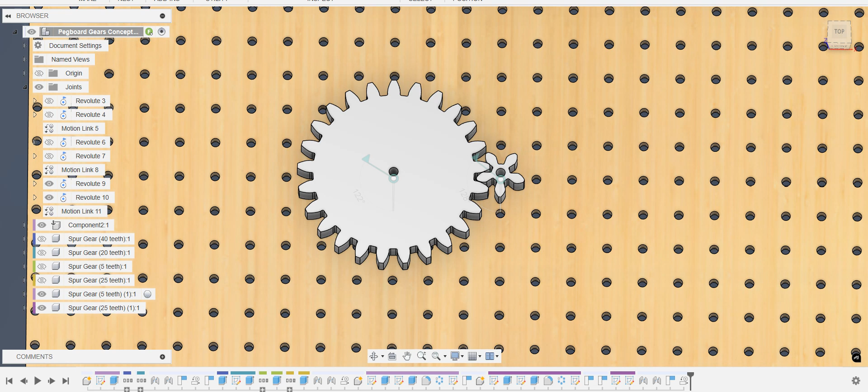So let's head over to utilities, and we're going to go to add-ins, scripts and add-ins. And using the spur gear tool, we're going to make a spur gear, and we're going to add it onto this board. If we check the table that will be acceptable for this 1 inch increment that we've laid out,

the diametral pitch is always going to be 5, and that is to say there's always going to be 5 teeth per inch, okay? Because here it's the number of teeth divided by the pitch diameter there. So 5 teeth divided by the diameter of 1 gets us back to 5. 25 teeth divided by 5 is also 5.

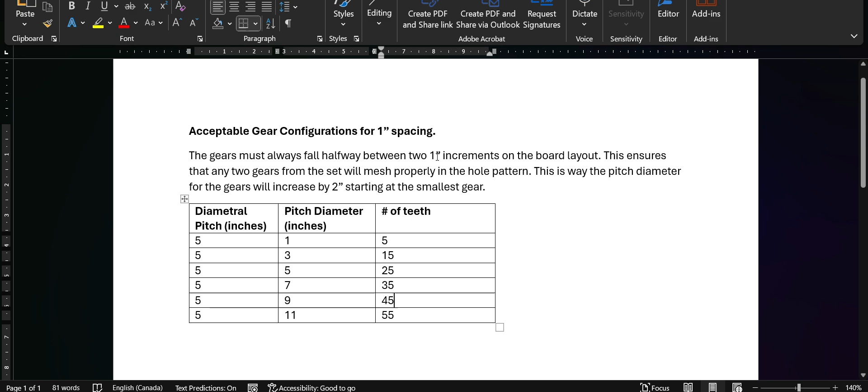So this is a function of the tooth shape, which means that all of the gears need to have this same pitch. So let's make a pitch diameter gear that is going to be 9 inches, and it's going to have 45 teeth. But we know it's going to fit and mesh with the rest of our gears.

So back over to Fusion, we're going to use the English standard, and we're only using that today because the pegboard comes in an English or imperial increment of 1 inch holes. We'll keep the pressure angle at 20 degrees, and the diametral pitch we need to be at 5 teeth per inch. The number of teeth here will be 45, and here we can see the pitch diameter as 9 inches.

Now the backlash, we're going to add a 0.1 millimeter backlash because we're targeting this for 3D printing, and that's going to add 0.1 millimeter of tolerance on either side of the faces of the teeth, just to make them a little bit more amicable to rotation and to take up any sort of extra material space that 3D printing has taken up, or in a real world application, sometimes that's space for lubricant or just play. Okay, so pitch diameter of 9.

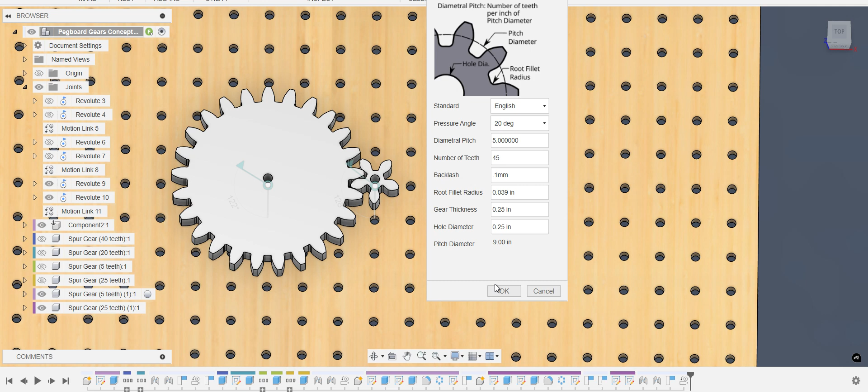And now we're going to attach this to the pegboard here. So I'm going to need to use a joint, but actually based on where it has been created, it makes more sense to move this first as a component. I'm going to move the entire thing. That's important to do it as a component there because we want to move the origin of it as well. And I'm going to select it, and I'm just going to move it so that it's easier to see where it is and work with.

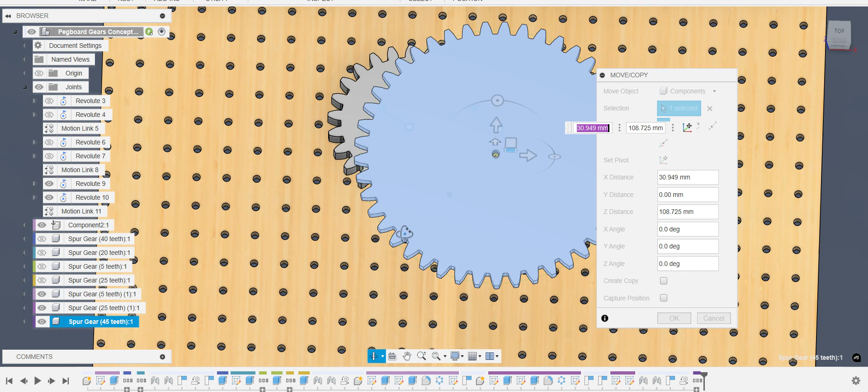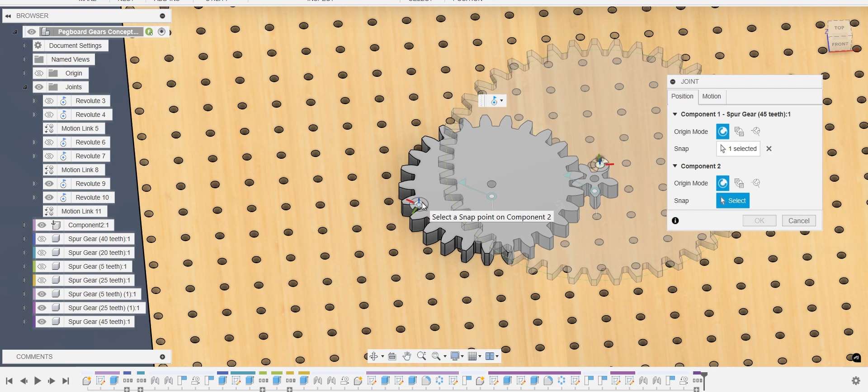Okay, so if I press J for joints, I'm going to select the bottom of the center of the gear. There we go. And now I need to select the correct hole here. So the diameter of our new gear is 9, so half of that is 4.5. And our existing gear diameter was 5, so half of that is 2.5. So that's going to give us 4.5 plus 2.5, that's 7 inches away.

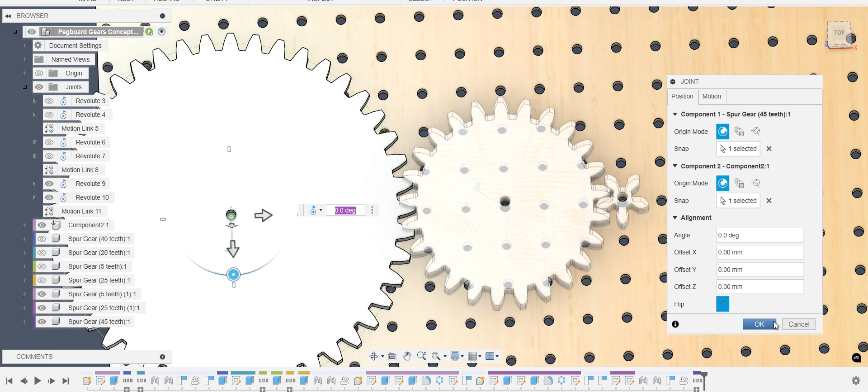So I should be able to count 1, 2, 3, 4, 5, 6, 7 holes away. And I should see that the pitch diameter for the two should be tangent now, as in the ideal mesh point is touching each other for both gears. So I'll accept that, and then I'll give this a rotation.

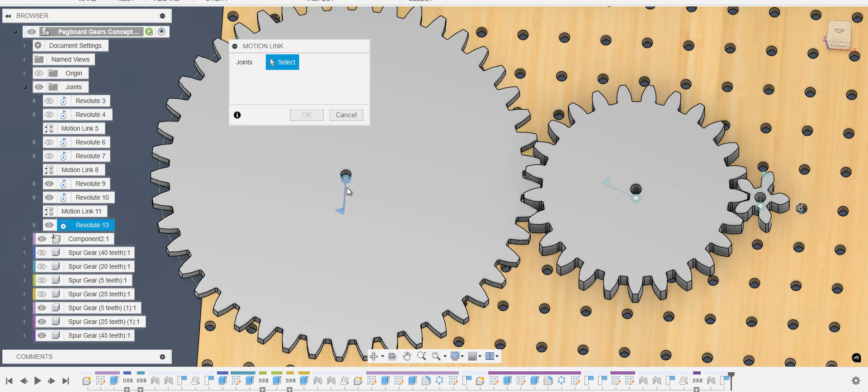It would help to look at this orthographically from the top. And I want to get the initial position for my simulation correct. I can see that I've got tolerance space there, and I should capture this position. Okay, so quick test, that's working, but they're not linked yet, so I need to create a motion link. Motion link asks for what joints am I linking. This revolute and this revolute.

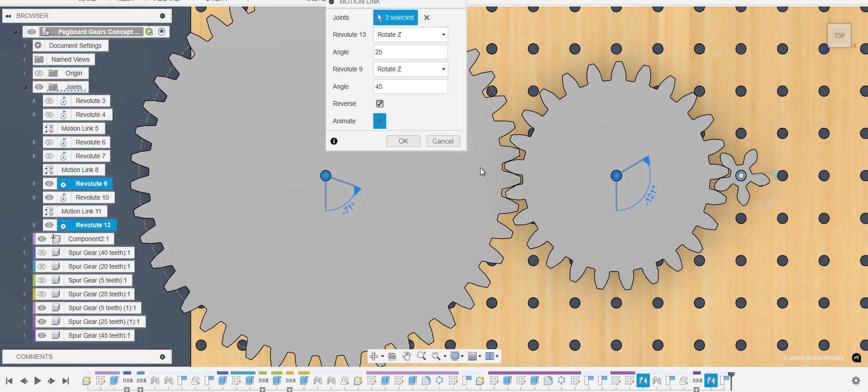Now here I can use the number of teeth as my degree relationship, and I can also select that they're reversed because any even set of gears is going to reverse direction, any even set. So my angle here, I think will be my first joint versus my second one. Okay, so with that in place, I can check it orthographically again, and I can verify that they're meshing in the right direction, in the right position, and at the correct ratio.

Now when I rotate the top one, I can see that for every one rotation here, I should get quite a few over here, and vice versa. And actually it would be 45 to 5.